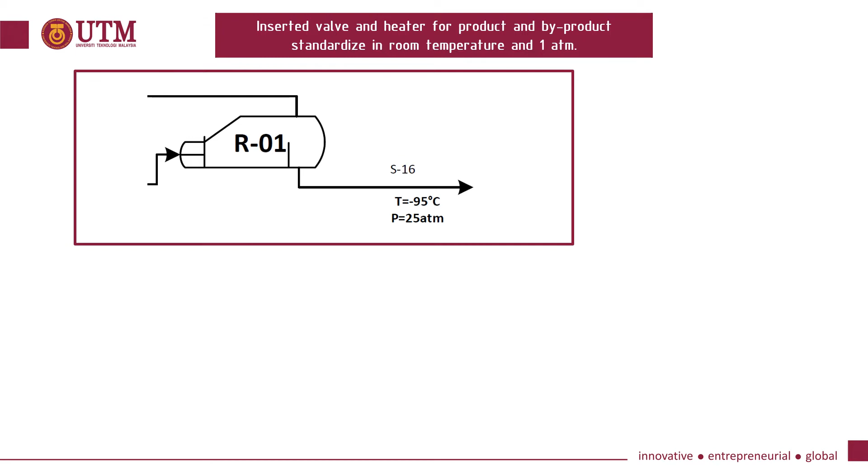Inserted valve and heater for product and byproduct standardized at room temperature and 1 atm. This is before we put valve and heater, and this is after we put valve and heater to standardize the byproduct at 1 atm.

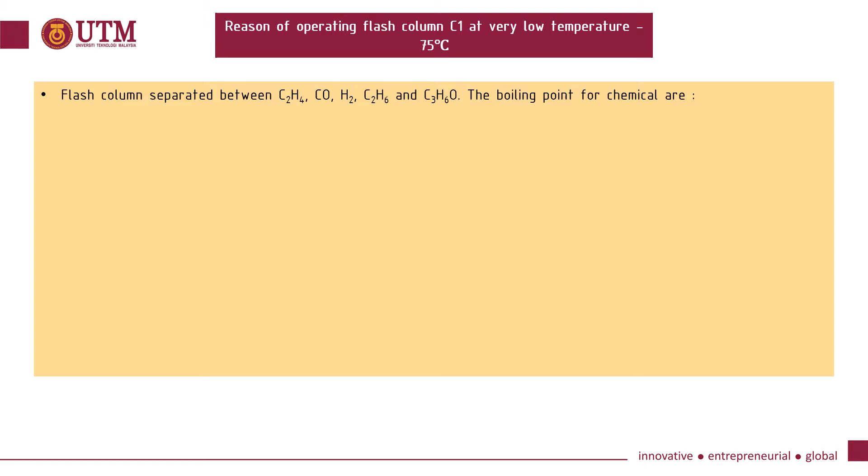Reason for operating flash column C1 at very low temperature, -75°C, is because the flash column separates between ethylene, carbon monoxide, hydrogen, ethane, and propanal, based on their boiling points. The operating temperature of the flash column should be between the boiling points of C2H6 and C3H6O because we want to separate between them. Recommended temperature from articles states the ranging temperature for the flash column is from -80 up to -50.

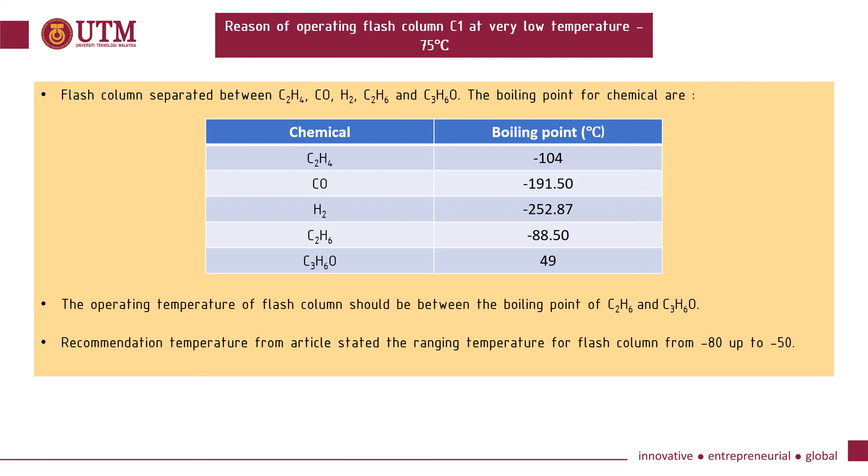Stream S30 is a mixture of components which is quite low purity. Why not subject the stream to a separator for further purification process in order to increase the product value?

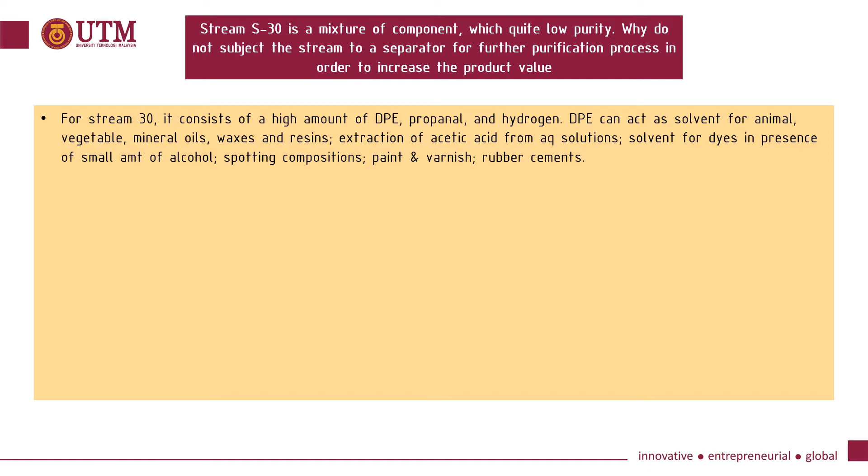First, stream 30 consists of a high amount of DPE, propanal, and hydrogen. DPE can act as a solvent for animal, vegetable, and mineral oils, wax, and resins, for extraction of acetic acid from aqueous solutions, as a solvent for dyes in the presence of small amounts of alcohol, and in spotting compositions, paint, varnish, and rubber cements.

Therefore, DPE will be further purified up to 99% purity and sold to other industries at a price of $3.2 per kilogram.

Hydrogen will also be further purified and recycled back into reactor R02 in order to produce a high amount of propanal.

Meanwhile, propanal is used in the manufacture of plastics, in the synthesis of rubber chemicals, and as a disinfectant and preservative. Propanal is a colorless, flammable liquid with a suffocating fruity odor. Hence, this component will be sold to other industries at a price of $16 per kilogram.

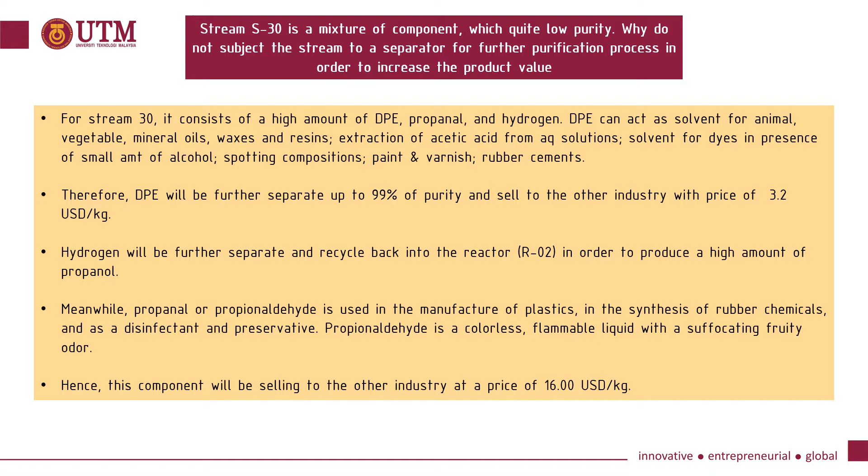Next, heat integration. First is the stream data extraction. This is our stream data extraction.

This is the minimum we use on the hot stream, which is 10 degrees Celsius, will be minus from their temperature, and will be the temperature adjusted.

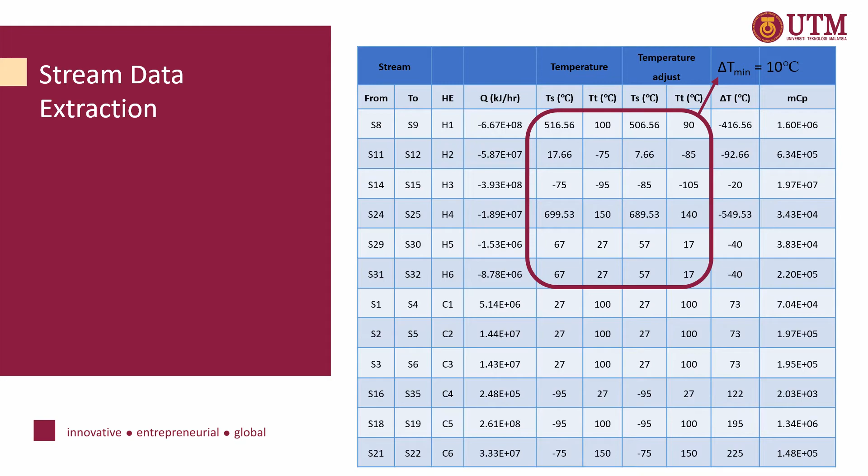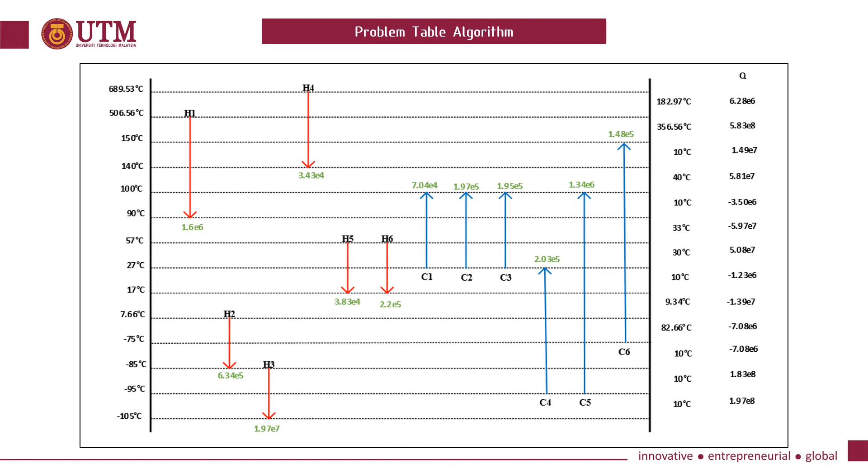Heat cascade diagram. A heat cascade diagram will be drawn accordingly to locate the hot and cool pinch temperatures as well as their target, or minimum heating and cooling requirement, for the entire plant.

The hot pinch temperature is 699.53 degrees Celsius, and the cool pinch temperature is 689.53 degrees Celsius. The minimum hot requirement is 0, and the cooling requirement is 8.19 times 10 to the power of 8 kilojoules per hour.

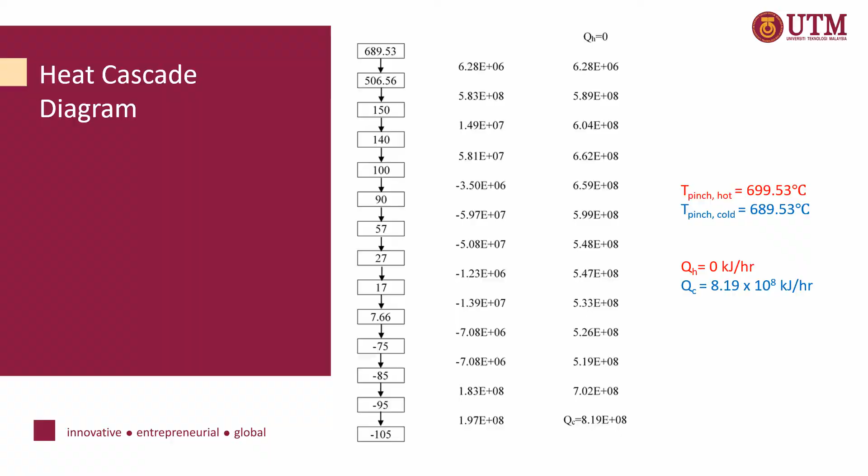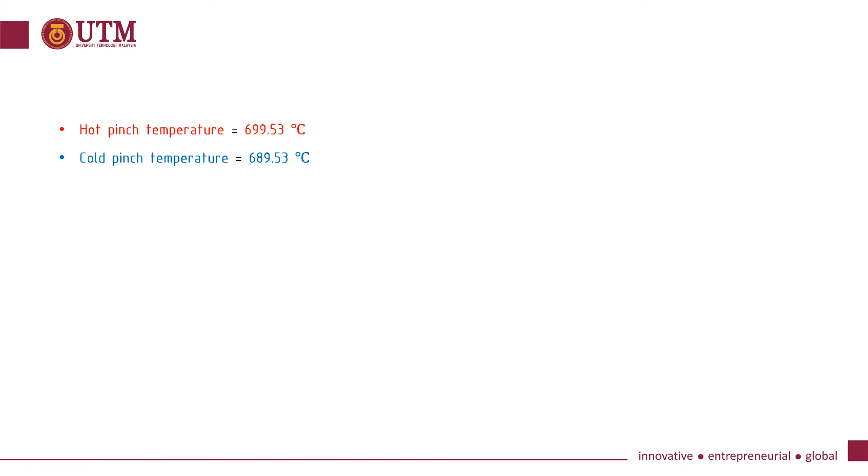From the step before, we extract the data: hot pinch temperature at 699.53 degrees Celsius, cool pinch temperature at 689.53 degrees Celsius, minimum heating requirement which is 0, and minimum cooling requirement which is 8.19 times 10 to the power of 8.

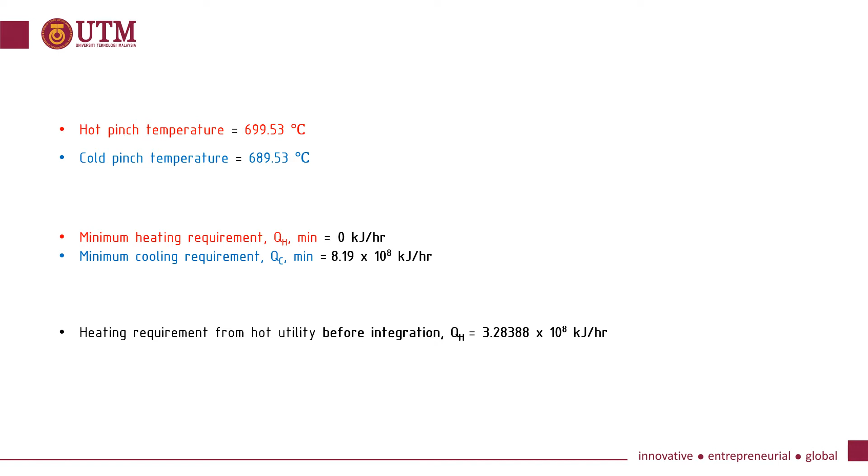Heating requirement before integration, and cooling requirement before integration.

Percentage utility savings. It turns out that despite the number of streams for the heat exchanger being reduced, the percentage saving for both external heating and cooling was still astoundingly high, with whopping amounts of 100% and 28.66% respectively. So we can save as much as 44.53% of utility energy usage.

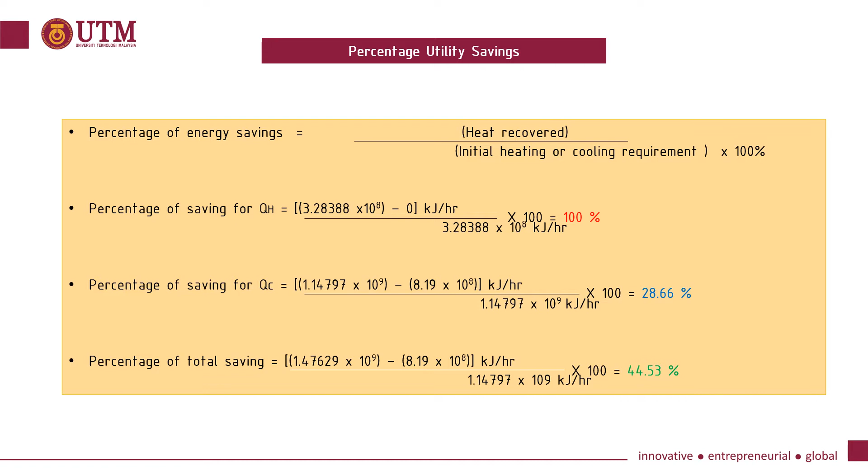Although a lot of heat exchangers may be required to achieve this target, the implementation of the tedious heat exchanger network is ultimately worth the cost, as a large amount of utility costs can be minimized in the long term.

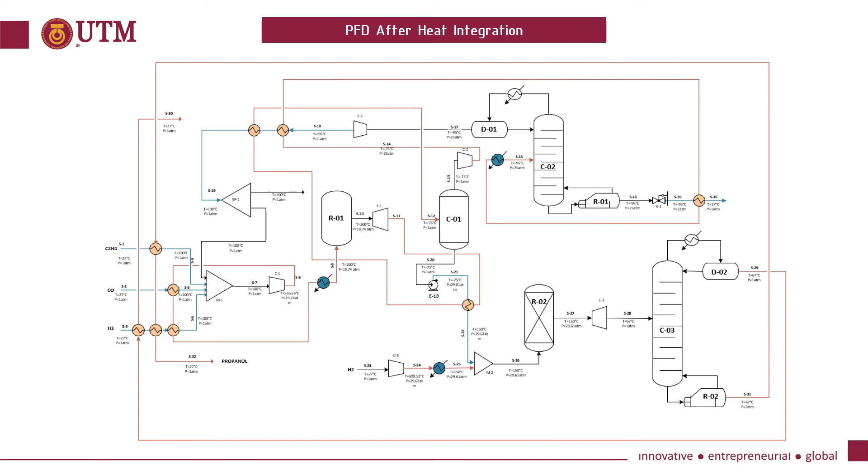PFD after heat integration. Before integration, there are 6 coolers and 6 heaters being used. After integration, we managed to reduce heaters from 6 to 0 and coolers from 6 to 3, and there are 9 heat integration processes happening.

Next, we're moving on to optimization. Generally, the goal of optimization is to maximize profitability, reduce cost, or increase operating efficiency of the plant.

Determination of optimization proceeds to distillation column C03. C03 is the last separation unit, which is important and responsible for producing propanol as the bottom product. In our case, the objective function is to minimize the reflux ratio of distillation column C03.

For the decision variables, we decide the flow rate of distillate, flow rate of bottom, cooling utility, heating utility, and total utility as the decision variables. For the constraints, the pressure of C03 is set between 0.1 and 2.0 atm.

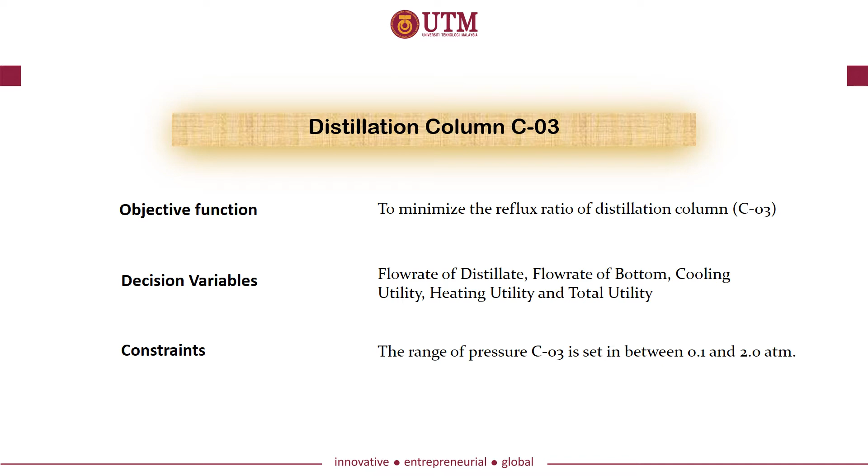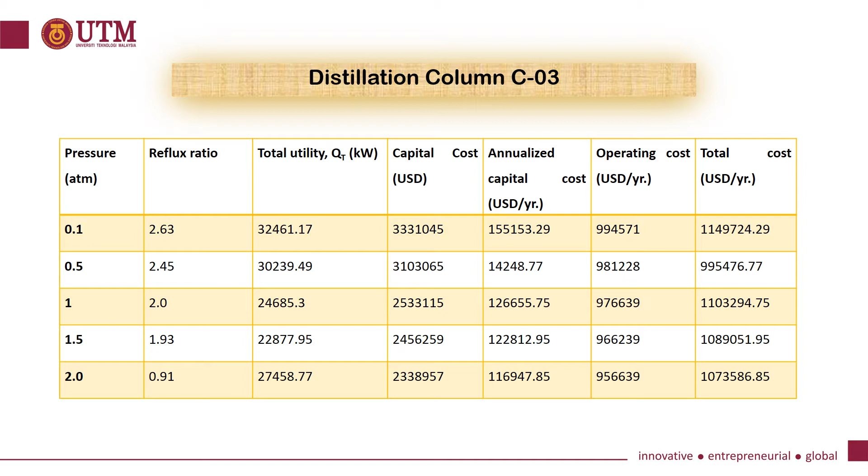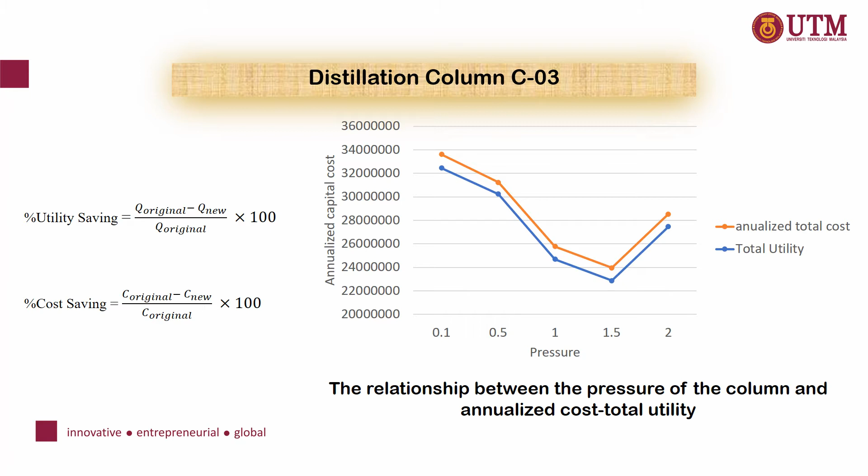Here is the list of formulas for the utility saving percentage and the cost saving percentage that can be calculated for the next slide.

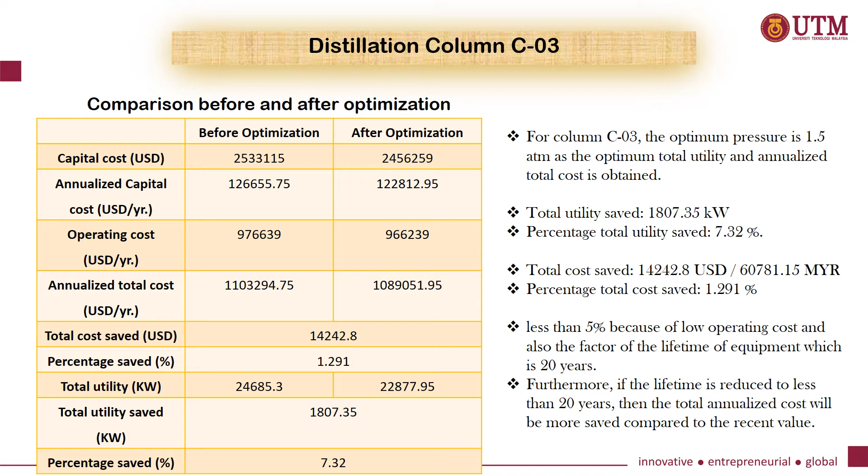Next, we are moving on to optimization for the cryogenic column C02. The objective function for C02 is to minimize the reflux ratio of the cryogenic column, same as the distillation column. The decision variables are still the same, which is flow rate of distillate, flow rate of bottom, cooling utility, heating utility, and total utility. For the constraints, the range of pressure for C02 is set between 25 and 31 atm.

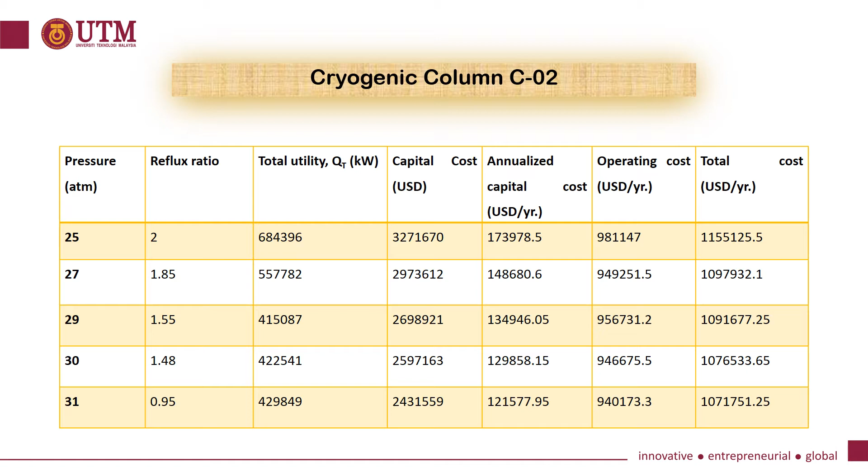Here is a set of data consisting of pressure of the cryogenic column, reflux ratio, total utility, capital cost, annualized capital, operating cost, and total cost. Still, the lifetime of the equipment is assumed to be 20 years.

Here is the same formula that we can use to identify the percentage of the utility saving and the percentage of the cost saving.

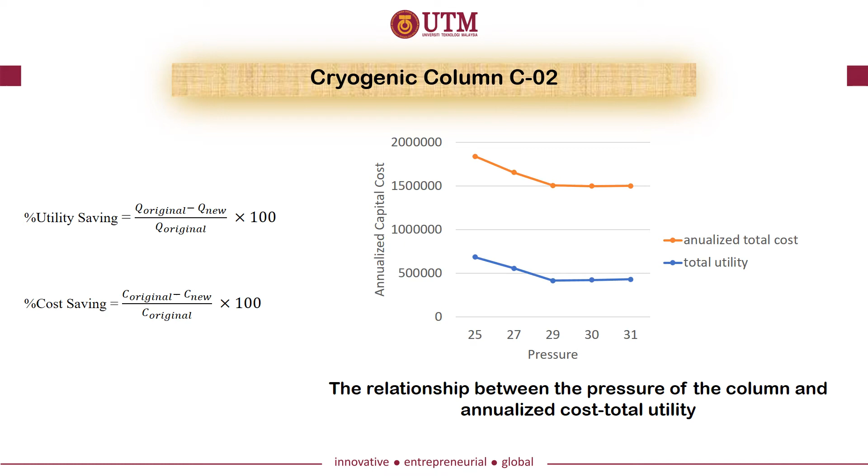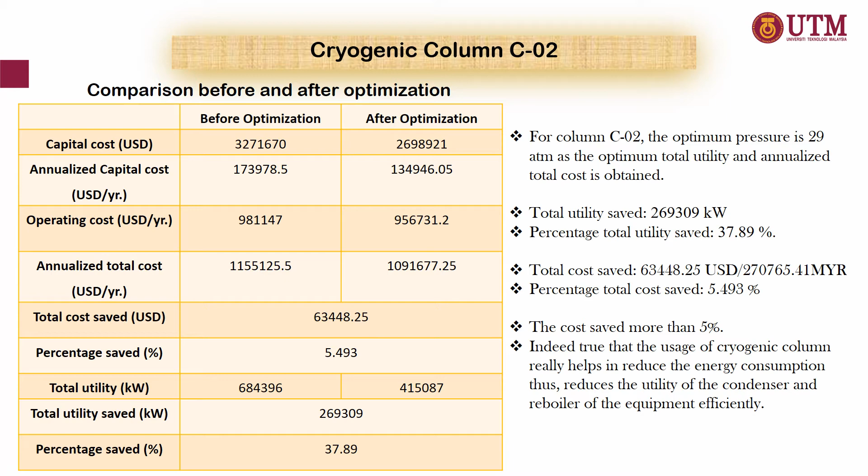270,765 ringgit Malaysia, and the percentage total cost saved is 5.493%. The percentage total cost saved is more than 5%. Indeed, it is true that the usage of the cryogenic column really helps reduce the energy consumption, thus reducing the utility of the condenser and reboiler of the equipment efficiently.

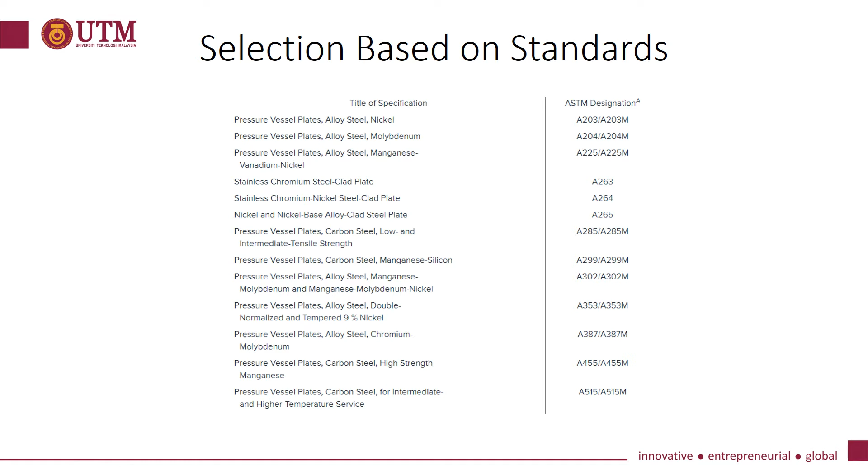So as you can see on the screen here, these are the ASTM standards that we use for our pressure vessel. And these are some of the standards that we use in the sizing of the heat exchanger network, heat exchanger, pump, and also expander.

So next, let's take a look at the equipment sizing. So now we're moving on to the equipment sizing. There's a lot of equipment to be covered, so I will only go briefly for each equipment. For each equipment, we'll be discussing the specification and some sample calculation for the sizing.

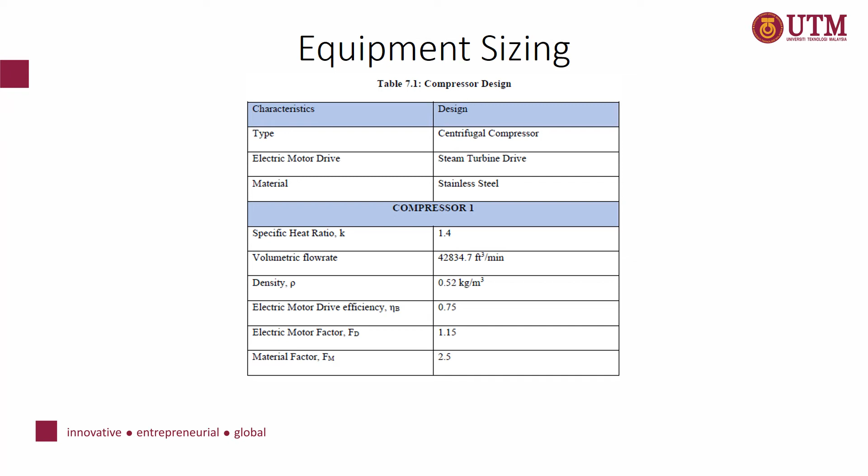As you can see on the screen here, this is the specification for the compressor. The type of compressor that we use here is centrifugal. And then you can see the electric motor drive, steam turbine drive, the material used, stainless steel. There are other specifications involved, such as the specific heat ratio, volumetric flow rate, density, motor efficiency, motor factor, and material factor.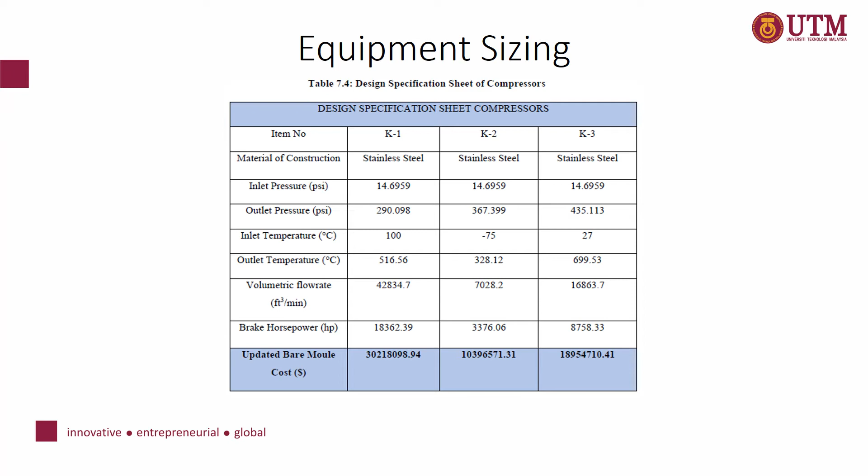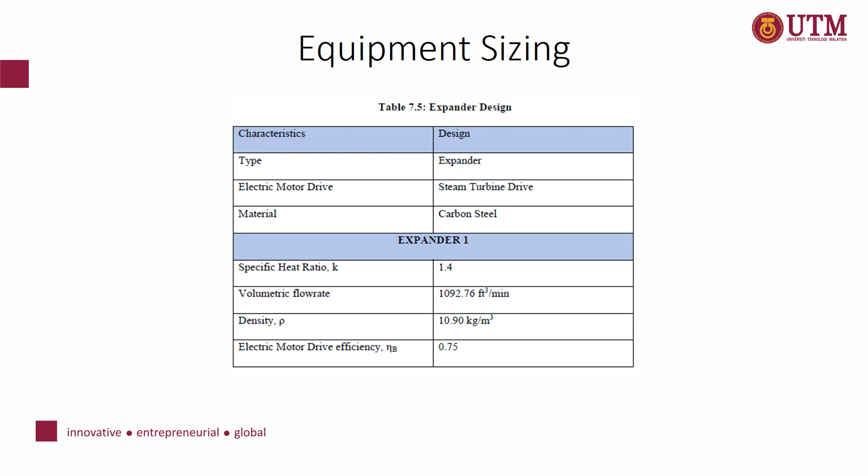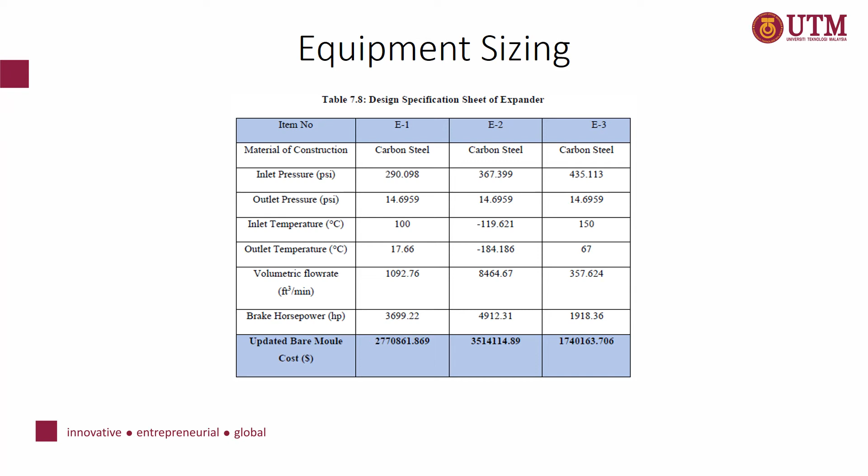Here is the specification for the expander. As you can see, we listed the same type of characteristics, such as the type, motor drive, material, and so on. This is the specification for each different expander that we use, which also includes the same characteristics.

Here is the sample calculation for the mixer. First, we obtain data from Aspen HYSYS, such as the volumetric flow rate and the residence time. From there, we can calculate the volume of the vessel in section B, then we assume the L/D ratio in section C, and then in section D, we calculate the internal diameter and also the height of the vessel.

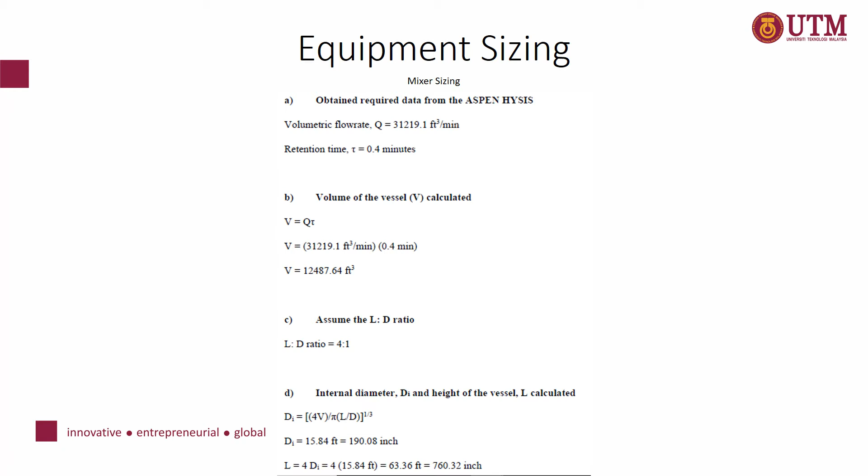This is the calculation for the sizing of the flash column. It goes through the same process as the calculation for the distillation column before. We list out the same data, and then we calculate all the parameters that were needed to get the diameter.

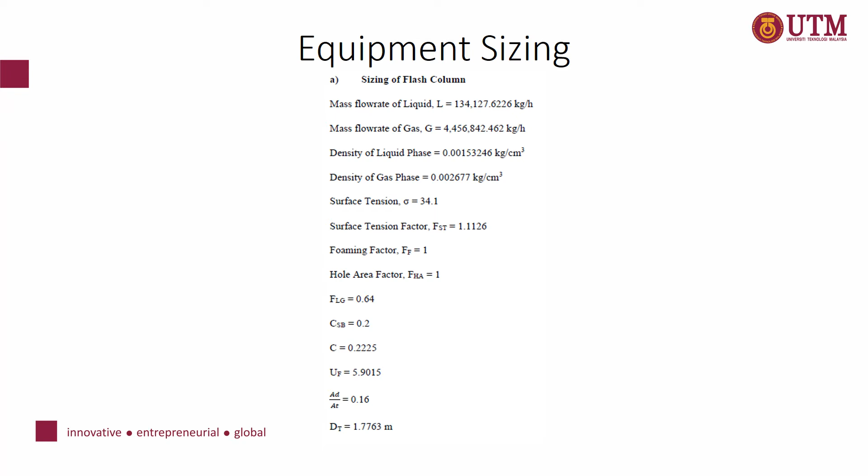This is the calculation for the sizing of the cooler. First, we calculate the log mean temperature. After getting the log mean temperature, we can plug it into the equation in section B to get the surface area of contact. Through that, we can get the pressure factor in section C.

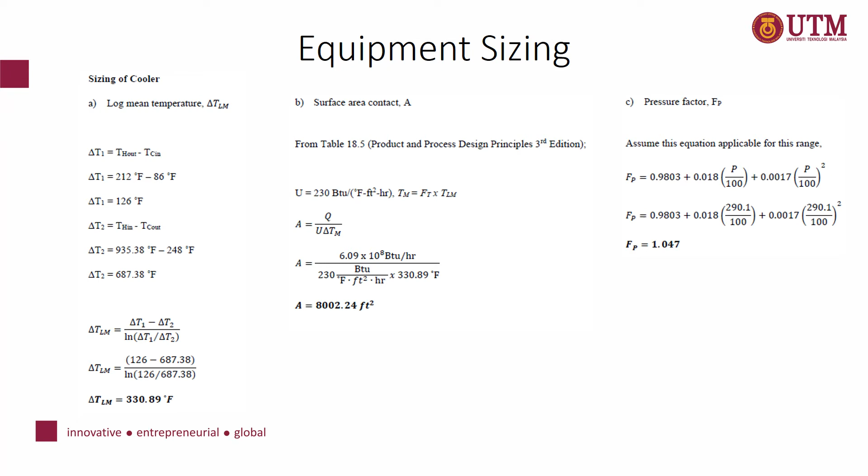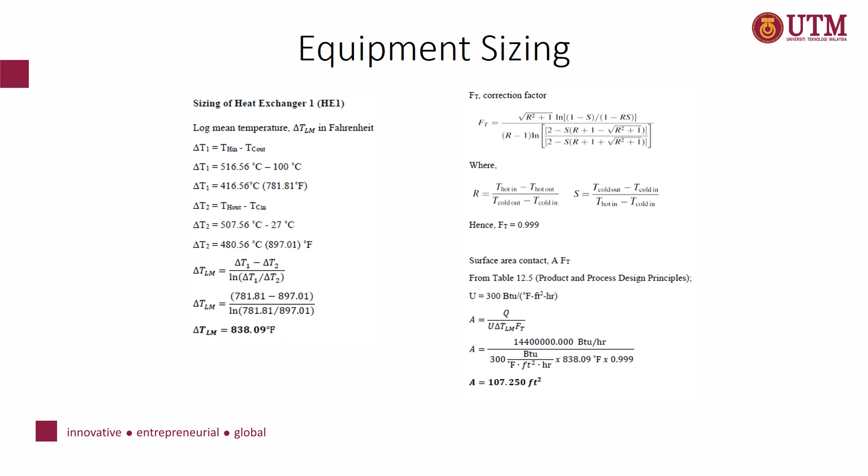Right here, we have the calculation for the sizing of the heat exchanger. First, we calculate the log mean temperature, and then we find the correction factor. Then we plug both of them into the equation in the bottom right to get the surface area of contact.

So now we're going to take a detailed look at the mechanical design. In the mechanical design part, I'll be discussing equipment such as the pump, distillation column, and reactor. The mechanical design is focused on elements such as the stress analysis, structural construction determination, and protection of the vessels. The detailed mechanical design is based on the book that we use, Product and Process Design Principles, third edition, and also codes and standards such as ASME and TEMA.

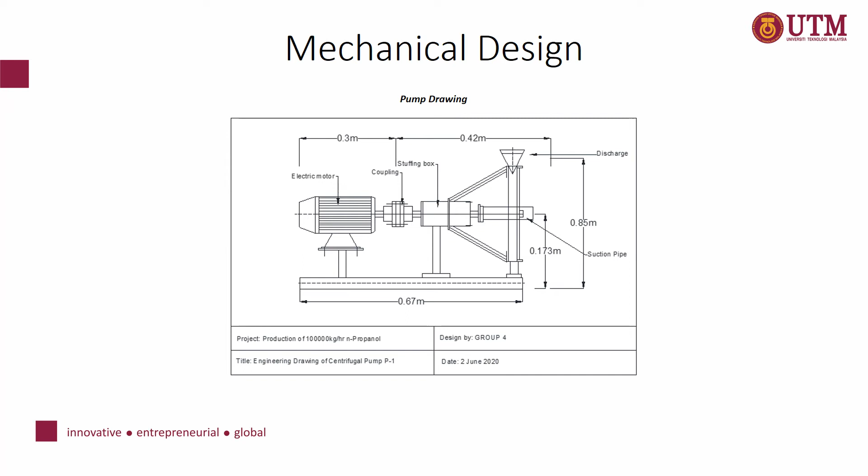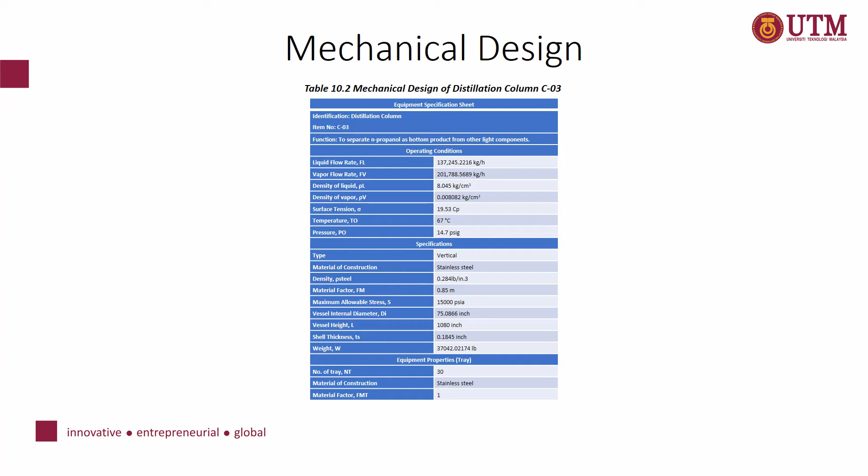Alright, this is the equipment specification sheet for the distillation column. The list goes just like before. We have the identification, operating condition, and also the specification. But we added the equipment properties for the tray. You can see the number of trays here is 30, the material used for the construction is stainless steel, and the material factor is 1.

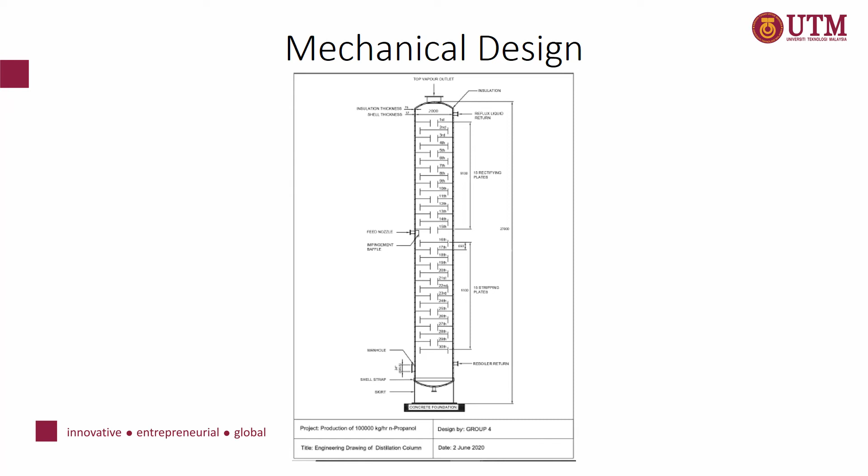So this is the zoom image of the drawing of the distillation column. As you can see, it's very detailed. We listed every part of the component, each with their respective dimension. For example, you have this rectifying plate here, 15 rectifying plates with 9100 mm. As a note, the dimension is in mm, and the total height is 27,000 mm. And the list goes on.

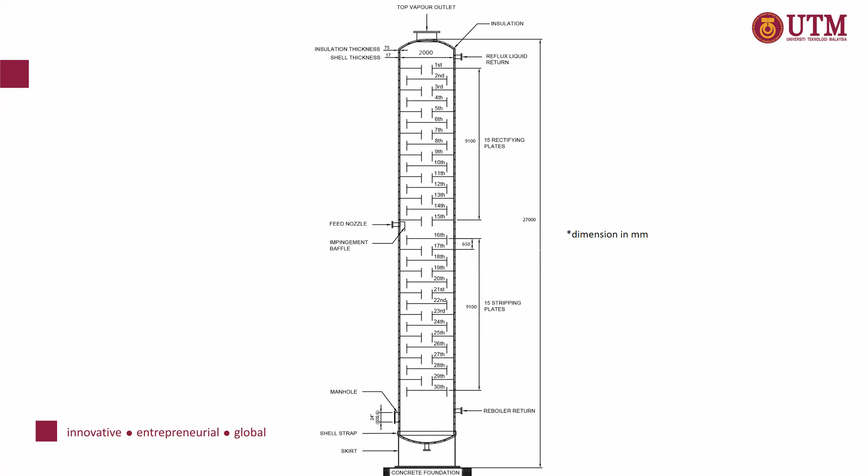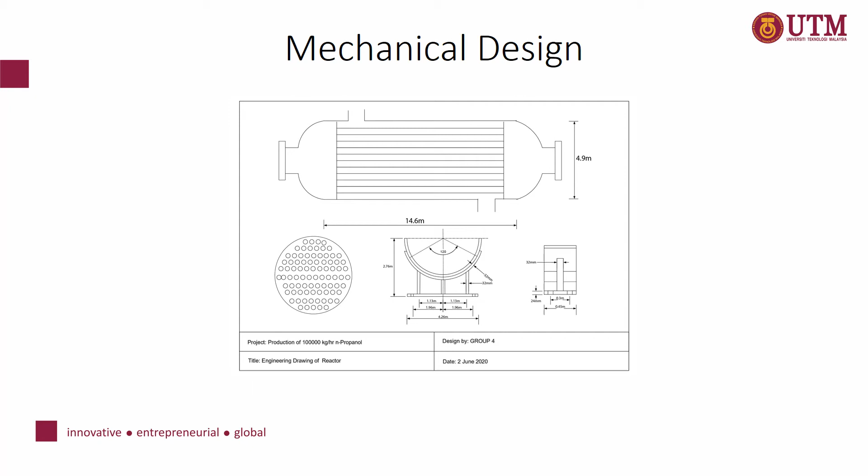So here we have the drawing of the fixed bed reactor. So you can see it's very detailed. We have listed every dimension that is needed, the length, the height, the number of holes, as you can see down here. And this is the cross-sectional view of the reactor. As you can see, we have the dimension of the hole, the size of the hole, the diameter, and everything.

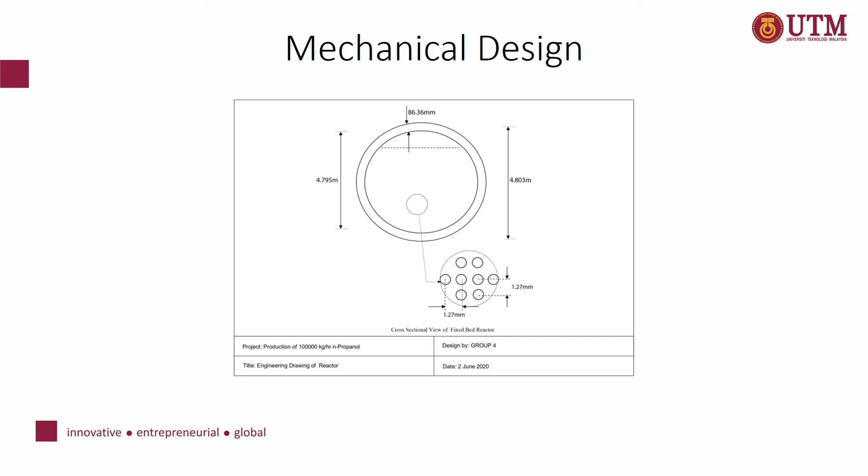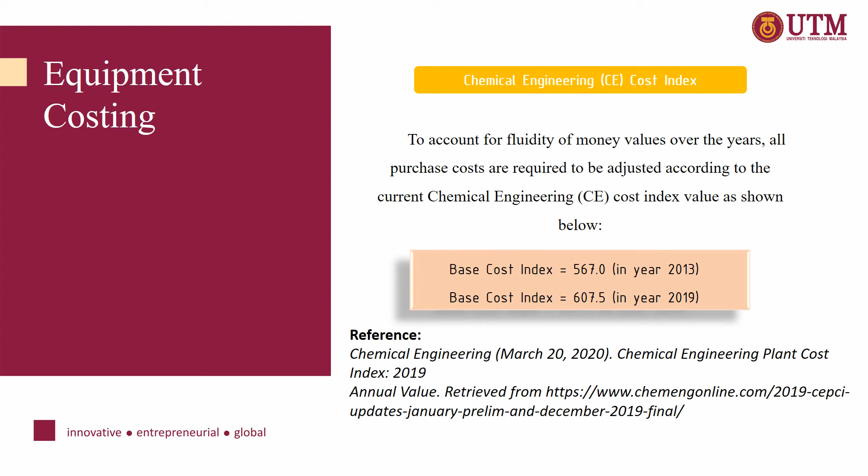Now I'll be explaining the equipment costing for all equipment in our plant. Before that, we start with the chemical engineering cost index, which is to account for fluidity of money value over the years. All purchase costs are required to be adjusted according to the current chemical engineering (CE) cost index value, as shown. For example, we use a base cost index in the year 2013 of 567, and for the current cost index in the year 2019, which is 607.5.

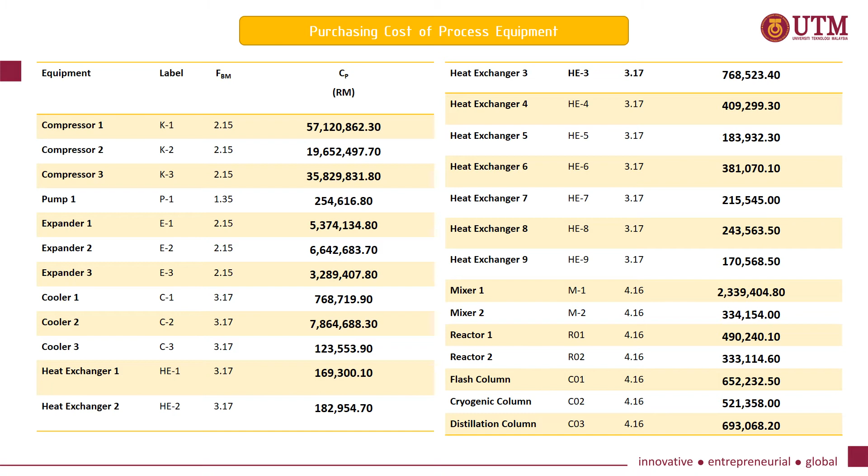This is the purchasing cost of process equipment. We need to calculate the purchasing cost of the equipment because from the purchasing cost, we can calculate the value of total bare module of the equipment. From that we can calculate the GRC cost. As I mentioned earlier, this is the total bare module cost, which is around 347 million ringgit, which includes all the equipment in the plant.

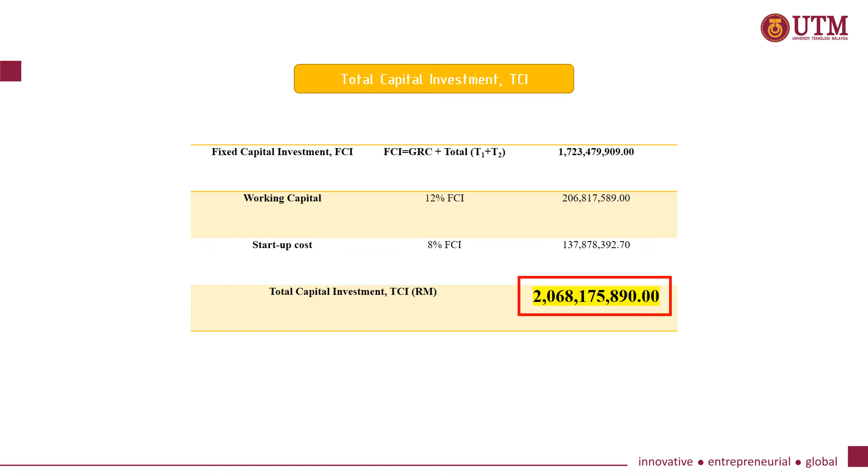Next, we calculate the grassroots capital, which is around 697 million ringgit. We also calculate the total capital investment cost, which is around 2,068 million ringgit, which includes fixed capital investment costs, working capital and startup costs.

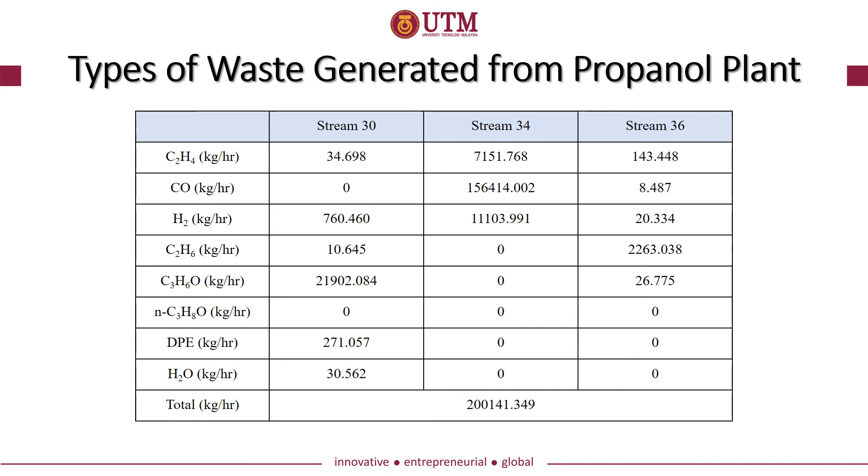Next, we continue with the next chapter, which is waste treatment. In this propanol production plant, the streams that connect directly to the waste treatment plant are stream 30, stream 34, and stream 36. The table below shows the composition of compounds for each related stream. There are a lot of treatment alternatives for various types of hazardous components in waste streams of different physical forms. However, capital and operating costs need to be taken into consideration in choosing efficient and improvable waste treatment.

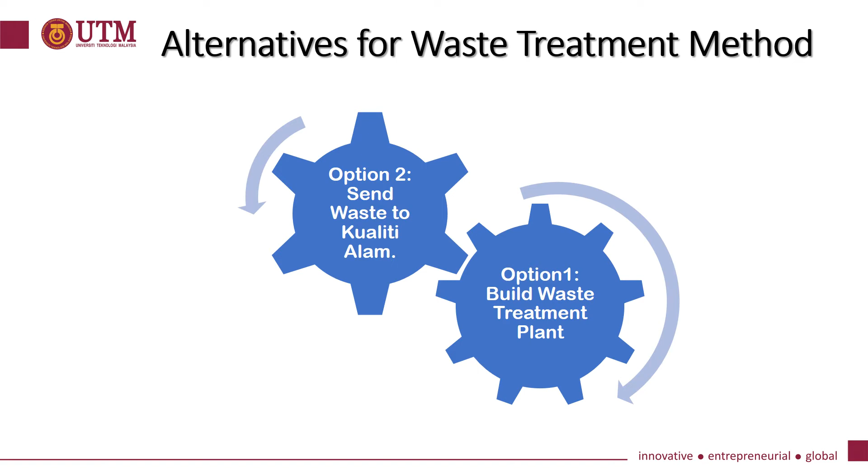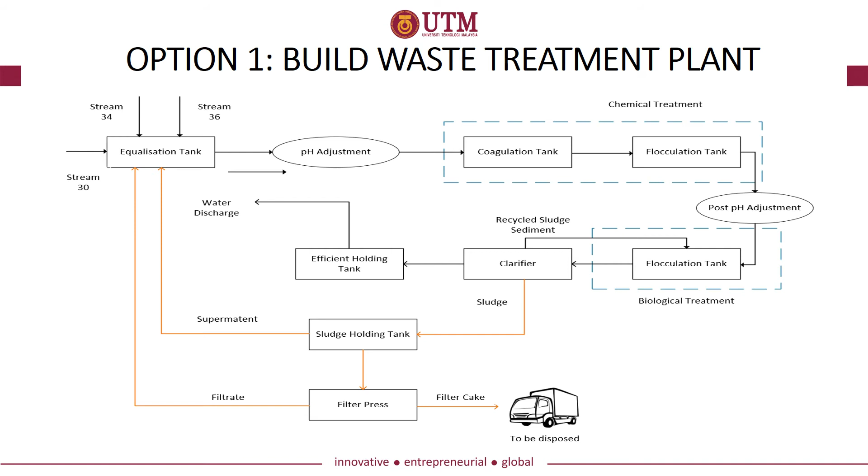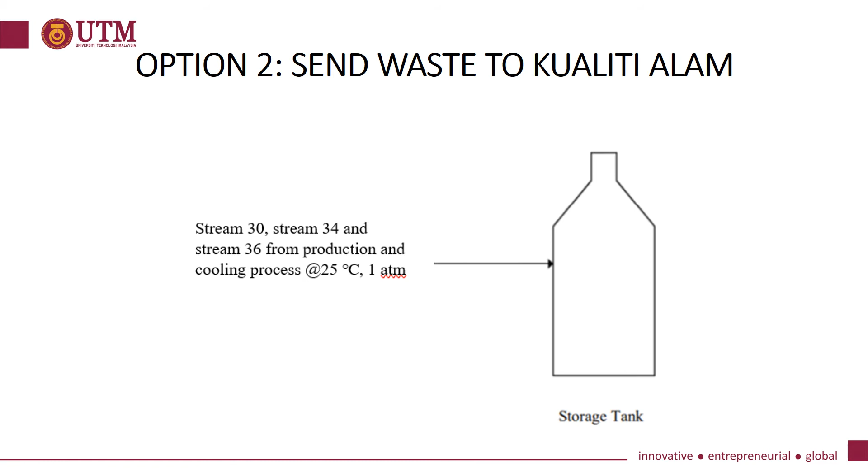Next, for option 2, which is send the waste to Kualiti Alam. So the waste from stream 30, stream 34, and stream 36 will be collected from the production and then will undergo some cooling process until the temperature reaches 25 degrees C, and then the waste will be stored in the storage tank in large amounts. Here is the cost estimation for the second option. The calculated total cost is around 79,203,000 ringgit.

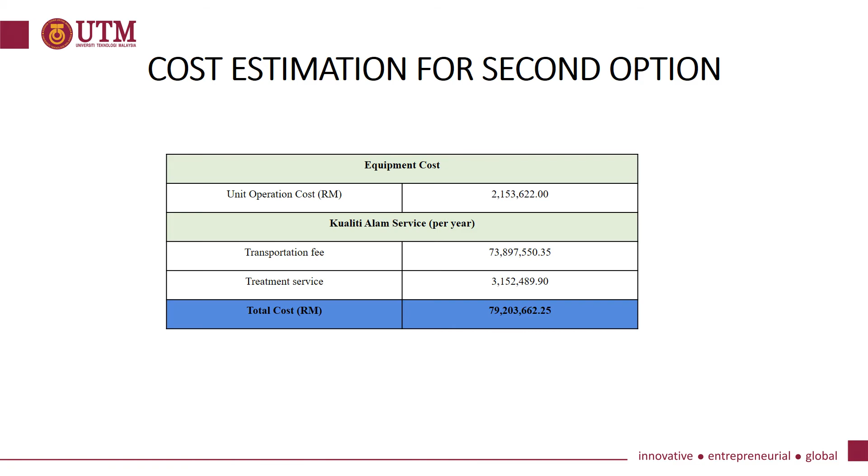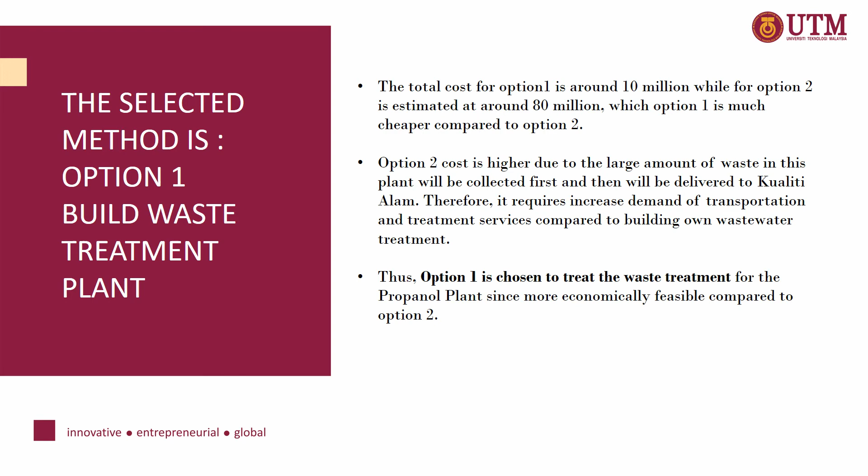After some comparison between option 1 and option 2, option 1 is chosen for the waste treatment of the propanol plant since it is more economically feasible compared to option 2. The total cost for option 1 is around 10 million, which is much cheaper compared to option 2. Option 2 cost is higher due to the large amount of waste in this plant that will be collected first and then delivered to Kualiti Alam. Therefore, it requires a lot of transportation and treatment service compared to building a wastewater treatment plant.

The first one is process control can ensure consistency. The next one can reduce the labor cost and can improve quality with higher level of safety.

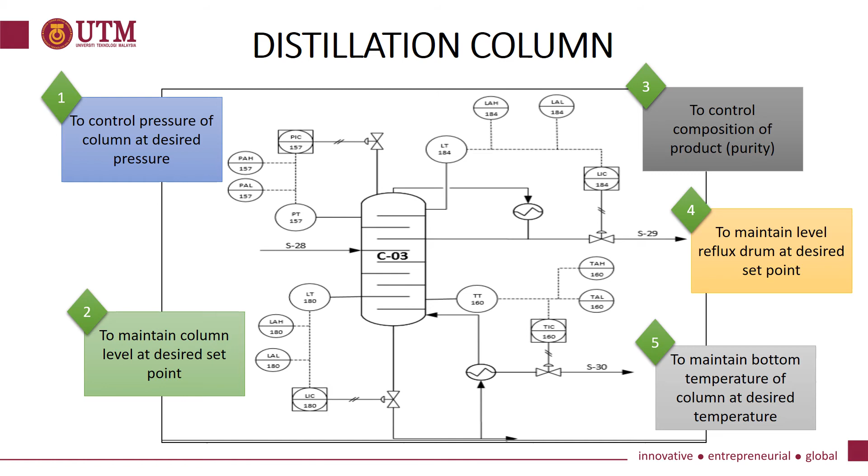We move to the distillation column. The first one is to control pressure of column at a desired pressure. Next, to maintain column level at desired set point. Second, to control composition of product purity. To maintain level of reflux drum at desired set point. And the last one, to maintain bottom temperature of column at desired temperature.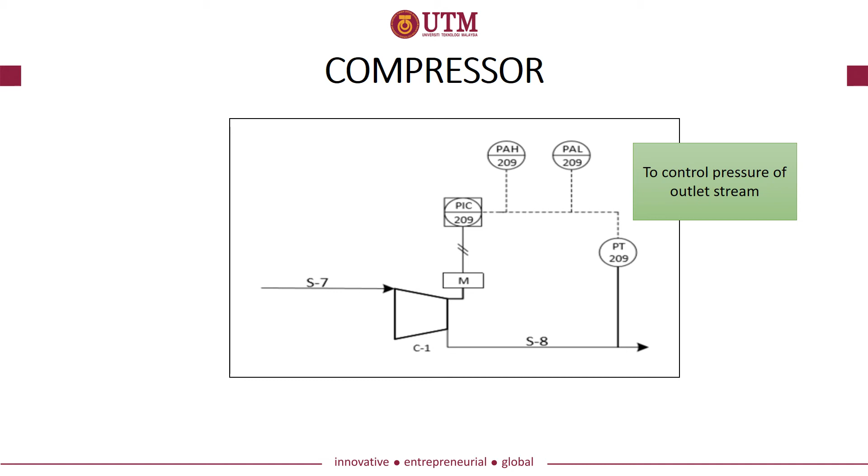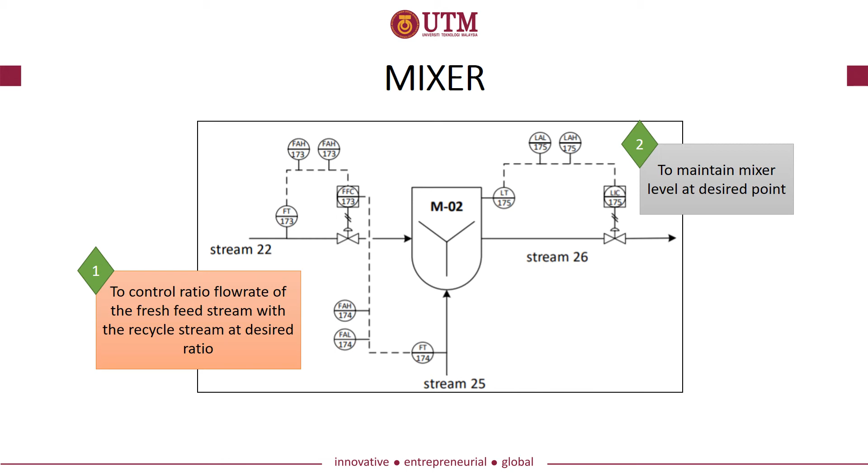For the mixer, we control the ratio flow rate of the fresh feed stream with the recycled stream at desired ratio, and the second one to maintain mixer level at desired point. For the pump, we control outlet stream pressure, and the last one, for the cooler, we control temperature of outlet stream.

Now we move to Chapter 9, Process Safety and Risk Management. Plant safety, external factors and strategies. Every chemical storage should not be situated adjacent to urban development. Extra precaution on flammable gases and liquids which are capable of causing a vapor cloud explosion, VCE. All piping systems located outdoors should be insulated and heat traced to avoid unwanted hotspots, which can result in vapor formation and accumulation.

Under housekeeping, all of the substances must be stored appropriately and must not be placed under the safety showers or locations which may block the access to firefighting equipment. The spillages of hazardous liquids and accumulation of dangerous dust must be clearly stated in the standard operating procedure to be followed properly. For utilities, routing of service supply should be secured from disturbance or hazards to ensure consistent supply.

And under transportation, hazardous properties of product or chemical should be clearly stated so that people at all stages of the transport chain are aware of them. Plant location, on-site and off-site consideration. Risk assessment for chemical plants should always be performed. The plant must be constructed in a spacious manner to facilitate regular inspection, which in turn is needed to ensure good housekeeping. Positioning of occupied buildings. The distance between occupied buildings and plant buildings will be governed by the need to reduce the danger of explosion, fire, and toxicity.

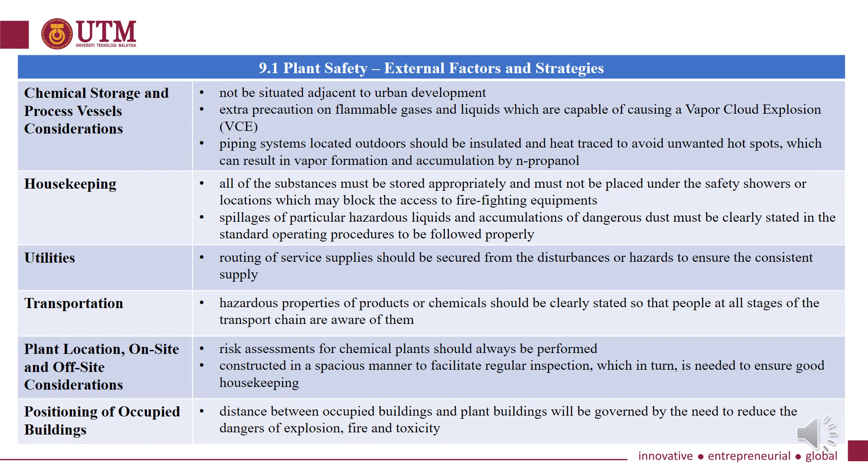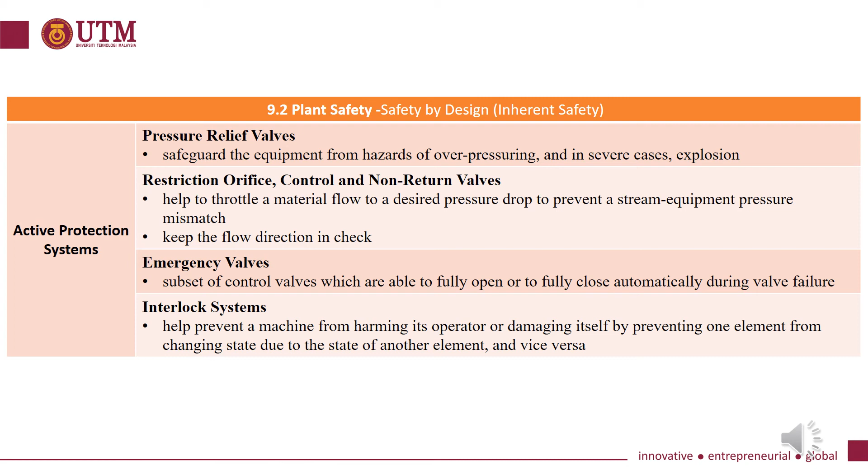Plant safety. In plant safety, there will be an active protection system to safeguard the equipment from hazards such as overpressuring, in severe cases explosion. There are some valves such as pressure relief valve, restriction orifice, control and non-return valves, emergency valves, and interlock system, which help prevent a machine from harming its operator or damaging itself by preventing one element from changing state due to the state of another element and vice versa.

Worker safety. Every worker must follow safety rules such as no smoking or eating when entering the plant, no drinking of alcoholic liquor before or when entering the plant, and safety instructions and danger signs must be clearly shown, observed, and followed. And all workers must wear personal protective equipment (PPE) such as safety shoes, helmets, safety glasses, and face shields. And every worker must ensure there's a first aid kit in their place.

The first aid kit should be placed at an easily reachable location. First aid must contain adhesive strips, wound dressings, gauze pads, and gauze bandages. And safety monitoring must be done to educate the workers themselves on the safety aspects of the plant. And all workers have the obligation to enforce safety rules and safe working practices according to the designated standard operating procedures, SOPs, within the plant.

Hazard and operability studies. Here we see the major equipment used in our plant, which is reactor, heat exchangers and mixer. First we move to reactor. The parameter is flow reaction. In flow, if there is no flow, it will be caused by failure of control valve, pressure too low, or pipeline leakage, and the consequence is production may be lost and no reactions occur.

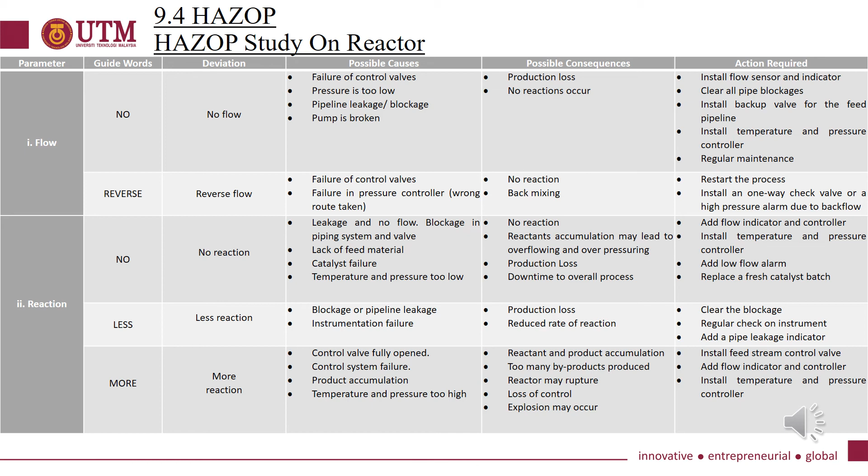The action required will be add flow indicator controller, install temperature and pressure, add flow alarm, and replace a fresh catalyst. There are some consequences if the guide words are used in reverse, or the reaction may be less or more. Apart from parameter flow and reaction, here temperature, pressure, and composition are recorded for the reactor.

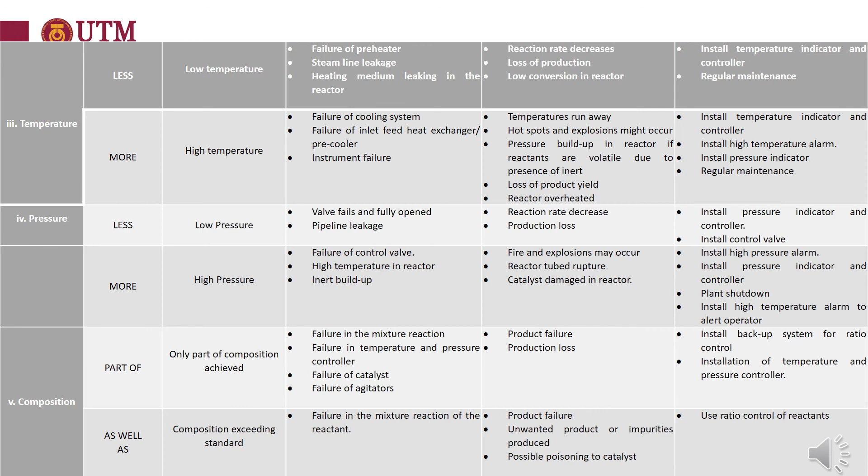Now we move to HAZOP study on mixer. There will be only one parameter, which is flow. If there is more flow, caused by control valve failure or preceding instrumentation failure, possible consequences are surges of material flow downstream, which may overload and flood the mixer. Overflowing might occur. So the action required is install flow indicator, controller, and high flow alarm at mixing vessel.

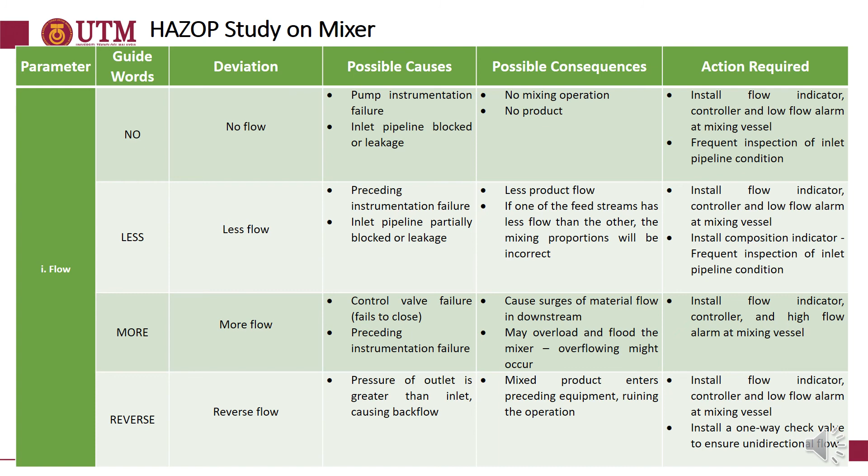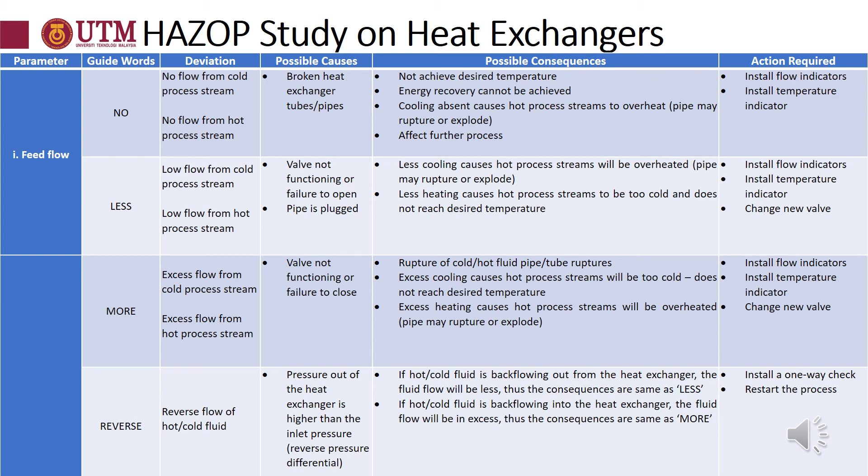Apart from feed flow, temperature and pressure are the parameters. So if the temperature is less, there will be some consequences and causes, so the action required is install low temperature alarm and indicator. For pressure, if there is more pressure, caused by high pressure at both ends of the process stream, the tube may crack and shell tubes may burst. So the action required is install high pressure alarm at both inlets and streams.

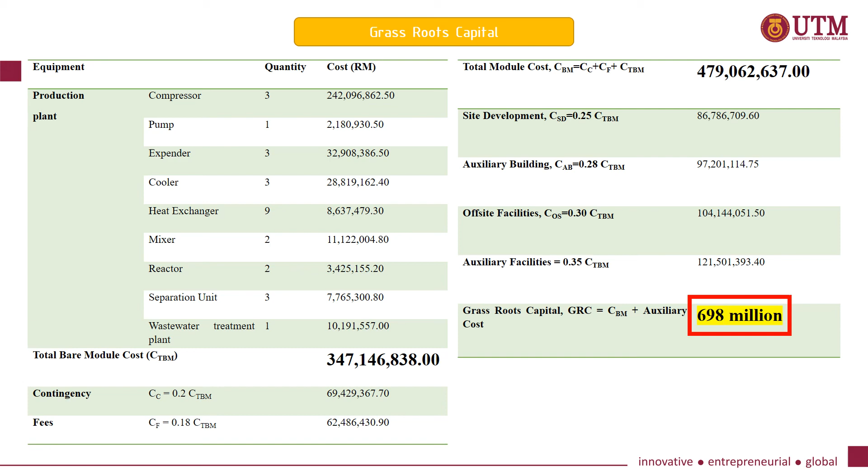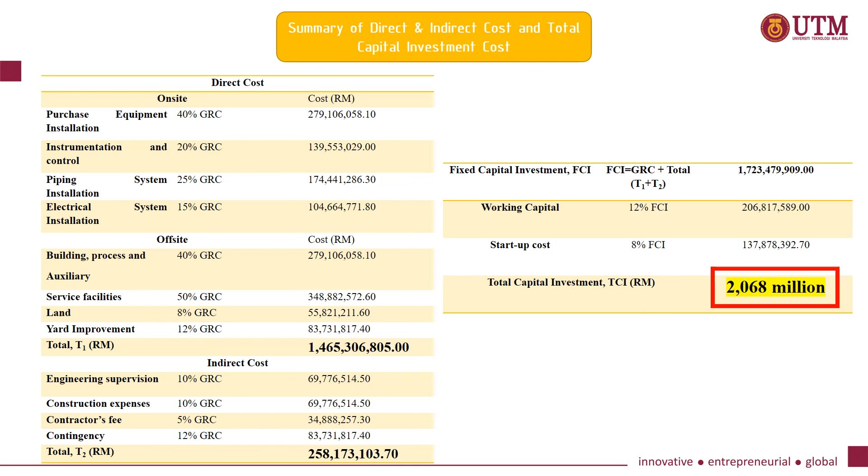Next, I will be presenting about profitability analysis. Grassroots capital (GRC) is estimated around 698 million ringgit, which includes total module costs and auxiliary costs. We also calculate total capital investment cost, which is 2,068 million ringgit, including fixed capital costs, working capital, and startup costs. Next, we also calculate the manufacturing cost. It is estimated around 6,690 million ringgit of total manufacturing expenses, which include direct production costs, utilities, miscellaneous, and indirect production costs.

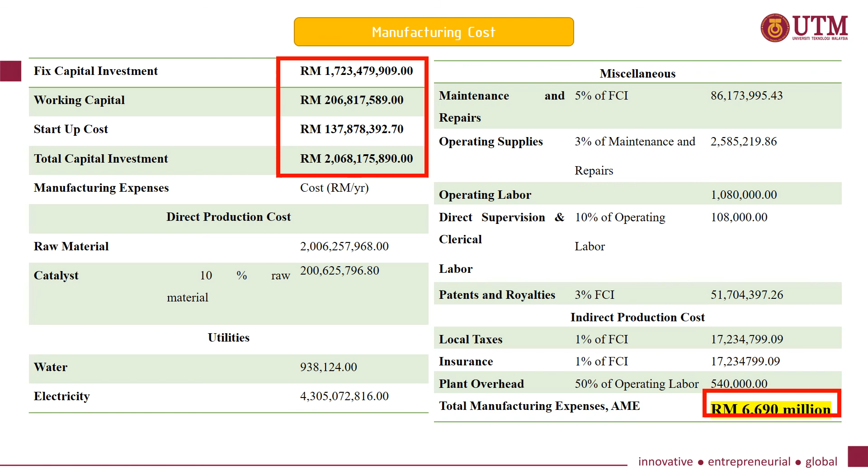We also calculated the value for depreciation, which is 70 million ringgit, revenue from sales, which is 7,631 million ringgit, net annual profit after income tax, which is 421 million ringgit, and then we calculate after-tax rate of return, which is 21.22%.

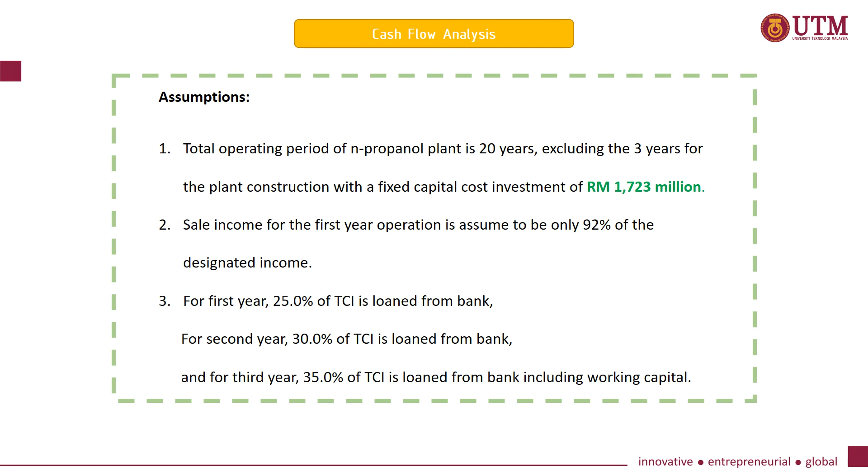These are all the assumptions that we made in order to do cash flow analysis. Firstly, total operating period of the N-propanol plant is 20 years, excluding the 3 years for plant construction, with a fixed capital investment of 1,723 million ringgit. Secondly, sales income for the first operating year is assumed to be only 92% of the designated income. Third, for the first year, 25% of TCI is loaned from bank. For the second year, 30% of TCI, and for the third year, 35% of TCI is loaned from bank, including working capital.

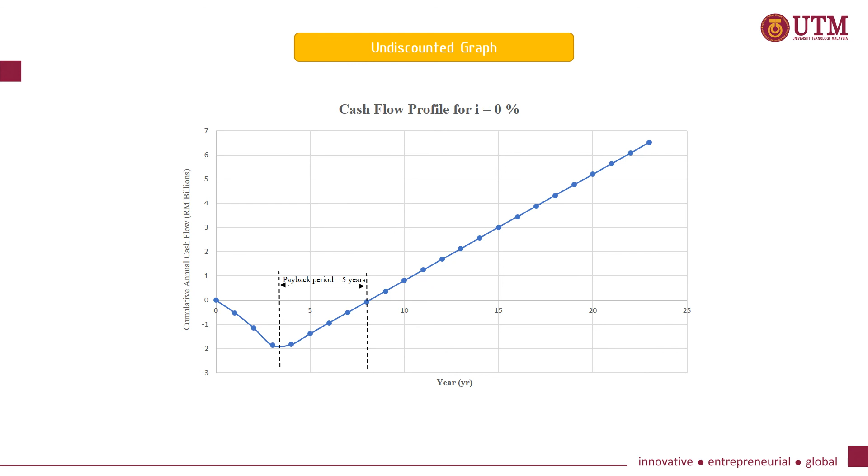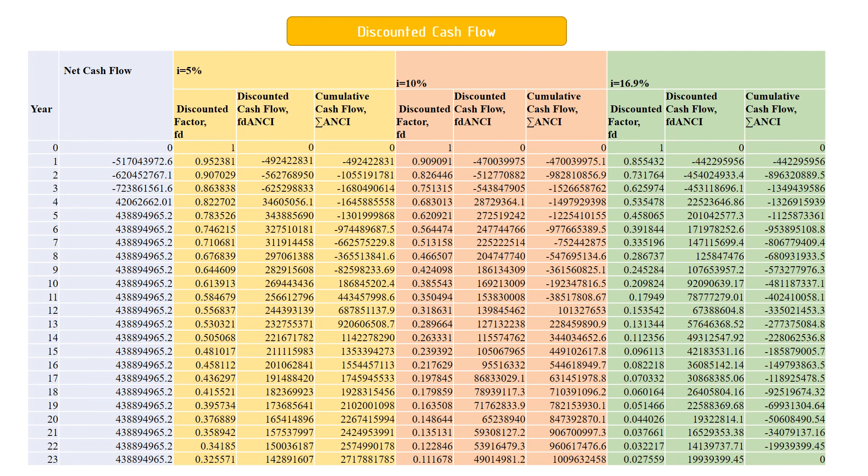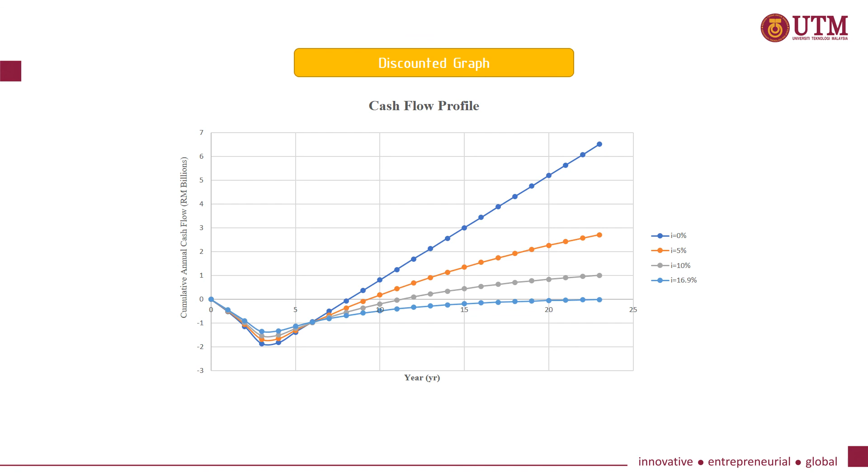As for the conclusion, the total capital investment (TCI) is 2,068 million ringgit. The total expenses for the plant are 6,982 million ringgit per year. The total revenue from sales for the plant is 7,631 million ringgit per year. The after-tax rate of return is 21.22%. The plant life is 20 years, excluding 3 years of the startup period, and the last one, the maximum discounted cash flow rate of return (DCFRR) is 16.90%. With all that, thank you.